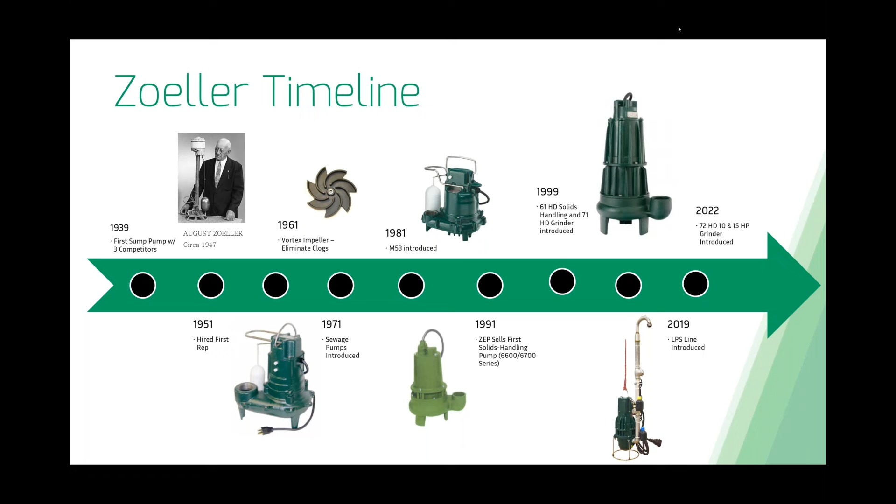Since 2017, we've added multiple items. In 2019, we were able to expand our low pressure sewer system lines to where we have more options available for drop-in replacements, new installations, stuff that we'll cover a little bit later on in this presentation. In 2022, we've had a few new additions with a horizontal discharge grinder and a 10 and 15 horsepower grinder pump that we'll cover a little bit later on as well.

So some of the highlights that we have for ZEP, we're not just a small pump manufacturer. A lot of people think of Zoeller, they think of just the M53 little half horsepower residential pump. We are a lot more than that now. We've expanded, we are up to 60 horsepower on solids handling pumps and now up to 15 horsepower on the grinder pumps. We also offer package systems through basins, control panels. So we're more than just a small little residential pump now.

Our product quality is second to none. We have quality checks from the point that the components come through the door, all the way through our painting process, through the machining process, and the assembly process, all here in the Louisville location. There are checks and balances all the way with the operators and our quality control team. And even the office employees, if they happen to be passing through the plant, they have an obligation to keep an eye out for anything that might not look right and let someone know to double check it before it actually gets built or shipped out to our customers.

One thing that sets the ZEP line, the Zoeller Engineered Product line, separate from the Zoeller Pump Company line is we are built to order. Our pumps are built specifically for the specifications for the job. So that might be a trimmed impeller, a shaft seal upgrade, cord length changes, whatever it might be. It's one person that's built that pump from start to finish and you ship it out the door from there.

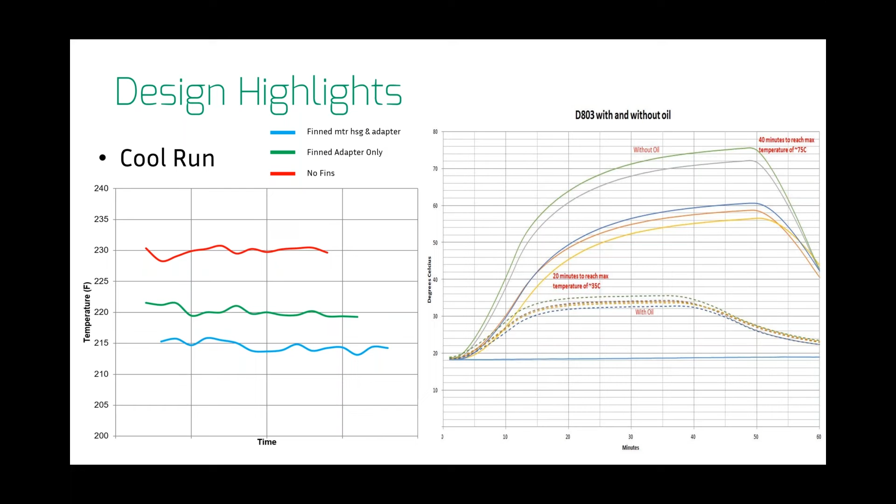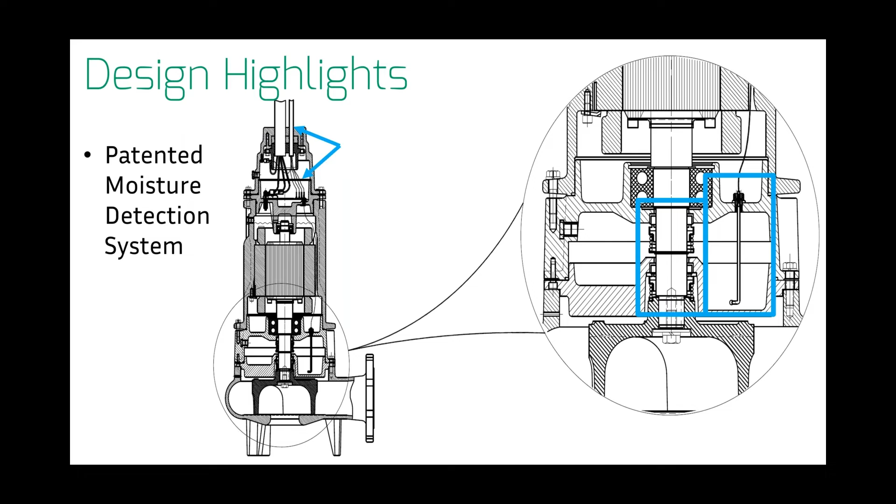Now, this only works if you have the feature built into your control panel. If you don't have that in your control panel and your pump does come with this moisture sensor, you would just cap off each individual wire and run it to your panel.

So there are two different designs that we have in ZEP: a single seal and a dual seal. The single seal is just one shaft seal on that pump, and the dual seal pump has the two shaft seals we just discussed. It comes with an adapter housing, giving it that extra cavity inside the pump. You can see side by side the difference in height between those two pumps.

The only pumps in ZEP that are not dual seal are our 6150 and 6260 series. On our grinder side, the 7008, 9, and 10, and our 7020 and 7021.

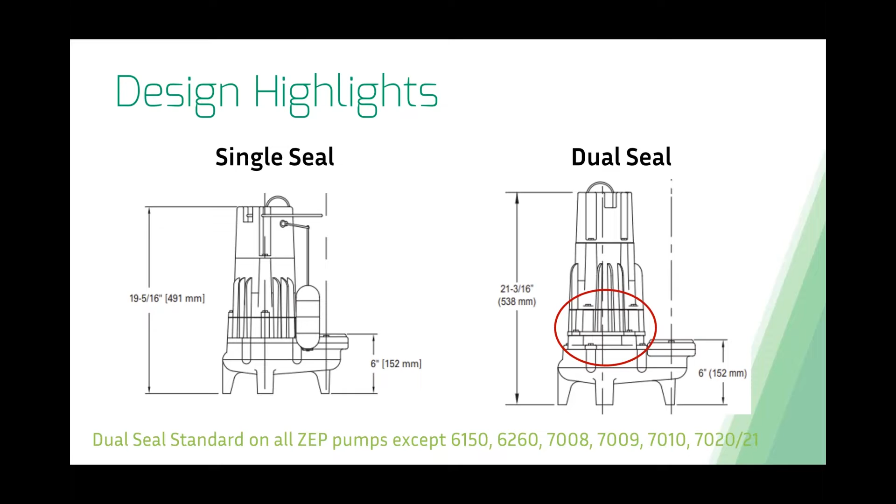So we're going to dive into the commercial duty pumps that we have here. This is going to be very high level, not getting into a lot of the details as far as performance or anything along those lines.

With our commercial duty pumps, the benefit is that any single phase pumps have all the starting components located inside of the pump itself. So if it's 115 volt single phase, you can use a piggyback switch to operate these pumps if needed. Of course, you could also use a control panel, but it gives you that option and flexibility to use a piggyback switch if needed. Like all of our pumps, each individual pump is 100% computerized water tested.

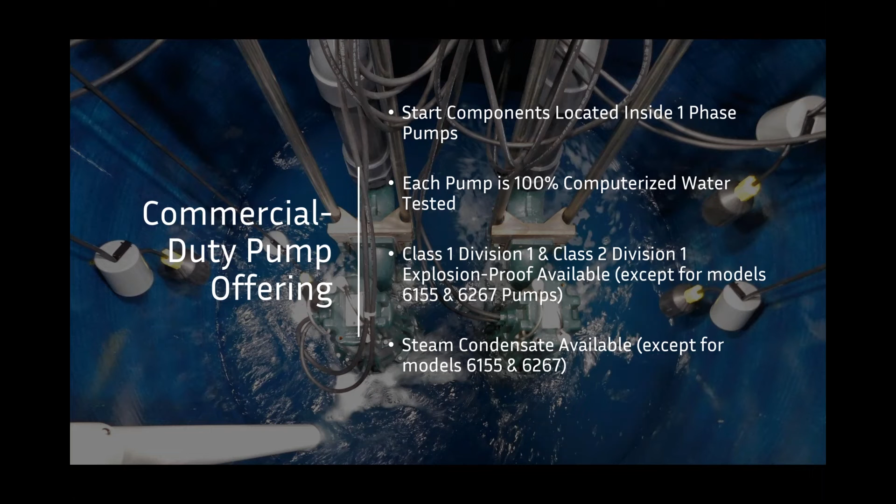We pressurize it, make sure there's no leakage between the shaft seals or gaskets, and make sure that pump is completely sealed up. All of our commercial duty pumps, except for the 6155 and 6267, have a Class 1 Division 1 explosion proof rating, which is for gaseous environments, and a Class 2 Division 1 rating for dust areas. All of our commercial duty pumps are rated for steam condensate, which is for things like boiler blowdown, except for our 6155 and 6267 model pumps.

So to get into each individual pump model here, our 6155 Effluent Pump is our half horsepower cast iron constructed pump. It uses an engineered plastic vortex impeller. This is one of our smallest pumps in the ZEP line.

The reason being is we had all these large pumps, but we weren't able to capture those smaller pump lines when a spec was going out or when a job was being awarded. So we had to create this pump in order to help our customers out, to have the full breadth of line that we have today.

It only comes in a 1.5 inch NPT vertical discharge. It uses a Viton gasket and a silicon carbide carbon shaft seal on that pump.

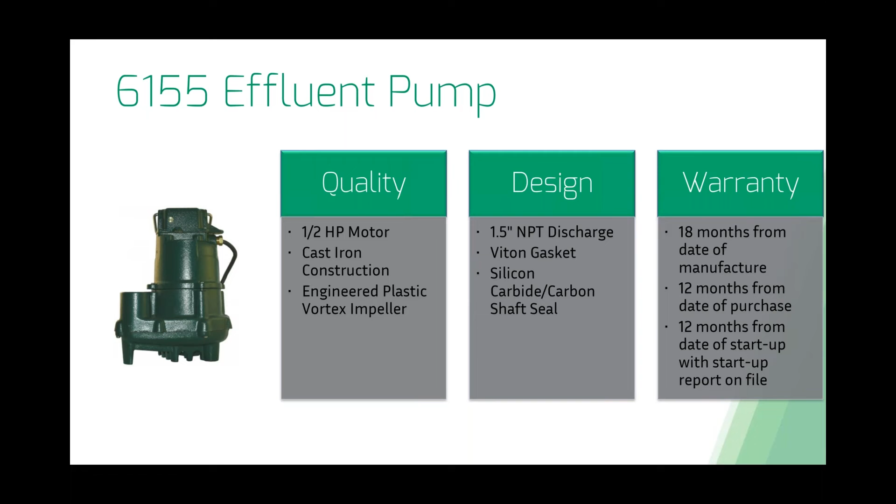Getting a little bit bigger in our Effluent Pump series is our 6160 and 6180 series. These pumps range from a half horse up to a 2 horsepower, and they use a cast iron vortex impeller. It comes standard with a 1.5 inch NPT discharge that's threaded on the inside of that flange that you see pictured there.

But if for some reason you are replacing a pump and you already have 2 inch or 3 inch discharge, we have the option to put a 2 inch or 3 inch bolted-on flange, like you see pictured, onto that pump there.

Now, this pump does have Viton gaskets. It is a dual seal, so it uses a silicon carbide carbon lower shaft seal and a carbon ceramic upper shaft seal. We're going to get into our sewage pumps on the commercial duty side with our 6267 pump.

This is a half horsepower pump using an engineered plastic vortex impeller with a 2 inch vertical NPT discharge. It is single seal using a silicon carbide carbon shaft seal and Viton gaskets.

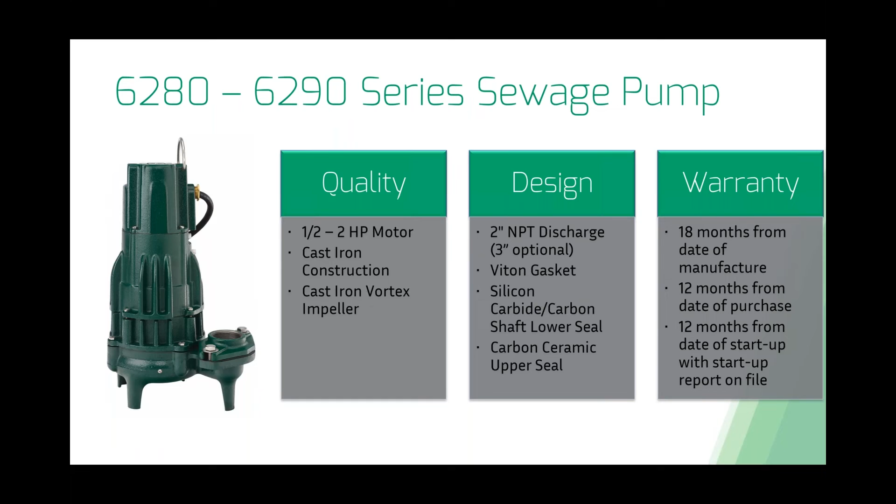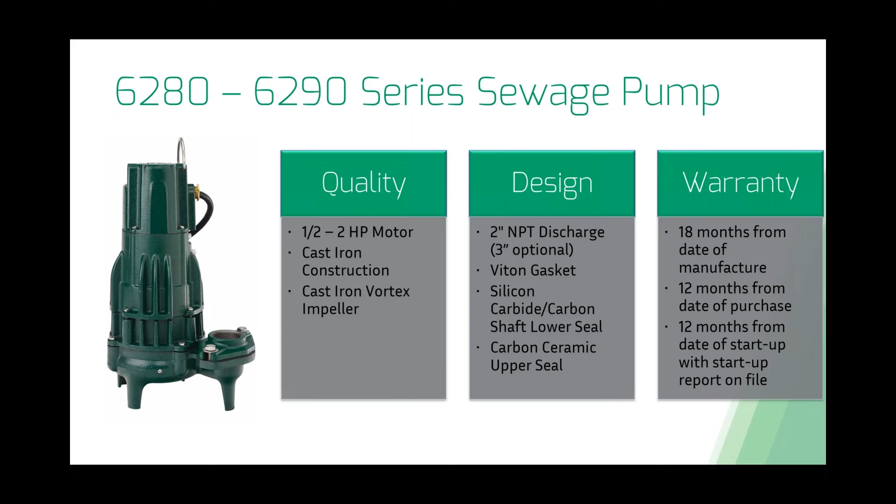Like our 6160 and 6180, we do have the sewage version of it, the 6280 and our 6290s, ranging from half horse up to 2 horsepower. They also use a cast iron vortex impeller, but they come standard with a 2 inch NPT discharge or 3 inch NPT discharge. Both of these are the bolted-on flange that you see pictured there. So when ordering, it has to be one or the other.

It does have Viton gaskets and dual seal, so it is a silicon carbide carbon shaft seal on the lower side and a carbon ceramic shaft seal on the upper side. In our 6400 series, we'll round out our commercial duty offering here.

We have it available in a 2 or 3 horsepower motor using the cast iron vortex impeller. It only comes available in that 4 inch horizontal flange discharge. It's an ANSI flange that we have on there. Like the others, it has a Viton gasket for all those gaskets built into that pump. And it is dual seal using a silicon carbide carbon shaft seal for the lower side and carbon ceramic for that upper side.

All these commercial duty pumps you're going to see more in smaller parking lots for dewatering applications. Could see them in a small school or a small strip mall, something along those lines where you're not requiring a whole lot of flow compared to what our larger pumps will do. But these are very robust pumps that we have to offer.

Now we're going to get more of our built-to-order pumps, if you will. So each pump in our heavy-duty solids handling pumps are built-to-order, customized for your specific specifications. Whether that might be a specific design point that you have to hit, we can trim that impeller down to hit that specific point.

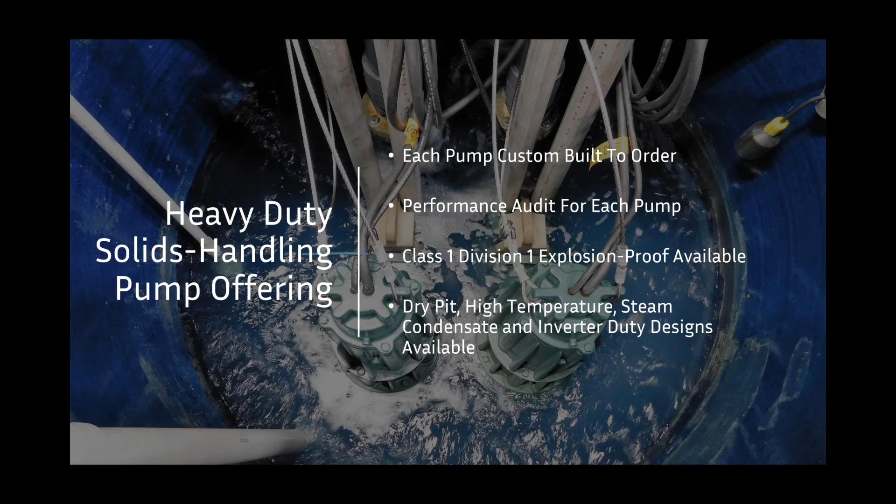First, we're going to dive into our 61 HD series. This particular one's available in 2 different motor styles, the 1750 RPM and 3450 RPM, with the 1750 RPM having a 1 to 7.5 horsepower motor and the 3450 RPM being 5 to 10 horsepower. These do come standard with the ductile iron semi-open impeller, but you can get a vortex impeller if need be.

Same with the discharge. It comes standard in a 3-inch or 4-inch horizontal, or of course a 3-inch NPT vertical discharge. With all these different configurations that you could possibly get with our heavy duty solids handling pumps, I will point out that it's a great idea to pay attention to your performance curves when selecting the pump.

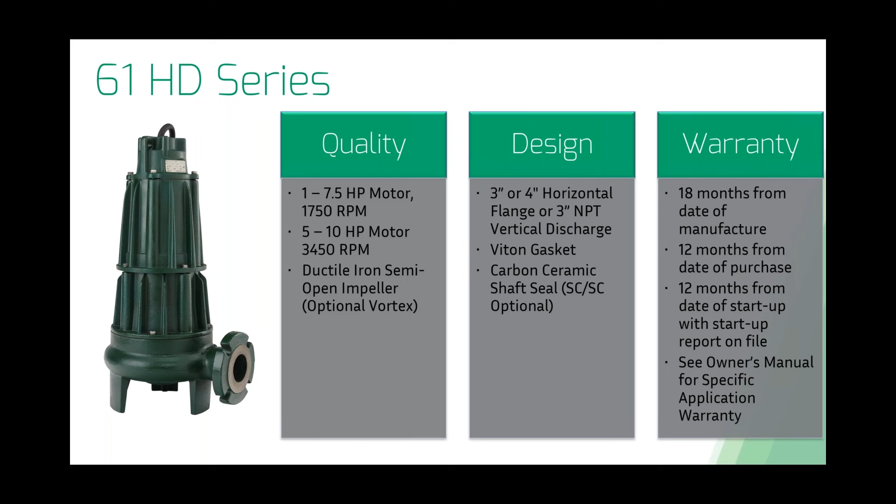I can say myself, I've done it too, where you're looking at a design point at one particular pump curve, but you're looking at the semi-open curve and not the vortex curve. Or you're looking at the 4-inch horizontal and not the 3-inch vertical discharge. So just verify whenever you're looking at these that you're looking at the right, even the right RPM curve, your right impeller, and your discharge curves, and even 3-phase and single phase can have a little difference in there as well.

Like our commercial duty pumps, these pumps come standard with a Viton gasket, but although they're dual seal, they come standard with a carbon ceramic upper and lower shaft seal, with silicon carbide being our most common upgraded shaft seal available for these pumps.

Going to go a little bit bigger with our 62 HD series, available in a 1750 RPM 5 to 20 horsepower motor. Like our 61 HD, it's available in a semi-open ductile iron impeller or the optional vortex impeller.

We also have a 4-inch or 6-inch horizontal ANSI flange discharge on these pumps, using Viton gaskets. Just like our 61 HD, it has the dual seal with the carbon ceramic upper and lower shaft seal, with the silicon carbide upgrade available.

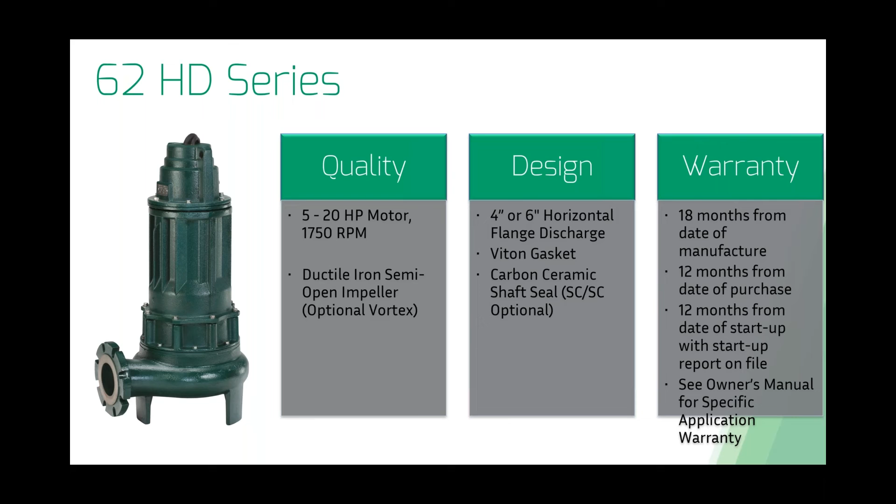Our last solids handling heavy duty pump is our 64 HD series, available in a 25 to 60 horsepower, 1725 RPM motor. It uses a ductile iron enclosed impeller, and we also have a vortex impeller available now for the 4-inch discharge. It comes with Viton gaskets and again the carbon ceramic upper and lower shaft seal, with the silicon carbide option available.

With these heavy duty solids handling pumps, we keep job folders on all of our serialized pumps. They have the history of that particular pump.

So say you order a pump with a semi-open impeller, you get to the job site, a couple of years goes by, and you realize you're having a lot of clogging issues and the semi-open impeller is not able to get through all those clogs.

We can swap out the semi-open impeller with the vortex impeller if need be. Of course, we just have to verify the design point and all that, because we do lose a little bit of design flow with the vortex impeller over the semi-open impeller.

We'll keep track record of that in our job folder, so down the road when you need to replace that pump, we'll have that record to show, hey, we switched it out at this point in time. Do we need to switch it to a vortex or keep it with the semi-open impeller? It's just a good living library of that pump while it's in that application for any records that you might need for down the road.

So from the solids handling pumps, we're going to switch gears and get over to our grinder pumps. Our grinder pumps use a scissor-like cutting action grinder plate and cutter. Some of our models, specifically our 7011 and some of our heavy-duty grinder pumps, have a reversing option on them.

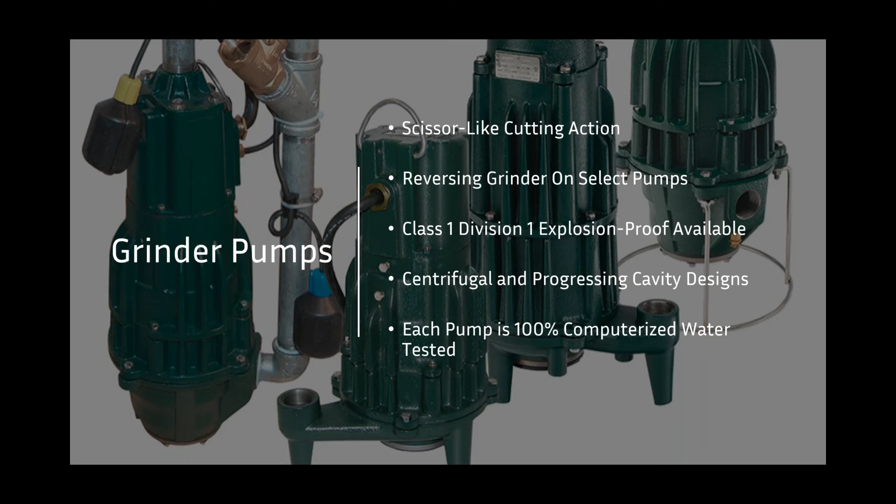So first we're going to jump into our single seal grinder pumps, the 7008, 9, and 10, available in 1, 1.5, and 2 horsepower motors with a vortex plastic impeller. You can see on your screen on the bottom left-hand side is the cutter plate for this particular grinder pump. It is available in a 1.25 inch NPT vertical discharge, and we now have a 1.25 inch horizontal discharge.

The benefit to that horizontal discharge is now we can replace our competitors' pumps with our pump. With the vertical discharge, we were handicapped and not able to go into a competitor's rail system, because by the time you adapted to the rail system with the vertical discharge, it made our pump too tall to actually connect up to the rail system. So we were eliminated, but now we are back in consideration for those types of applications.

They are built with the Viton gasket that we have across the Zoeller line, and we have a silicon carbide carbon shaft seal. Again, this is a single seal grinder pump that we use for that pump.

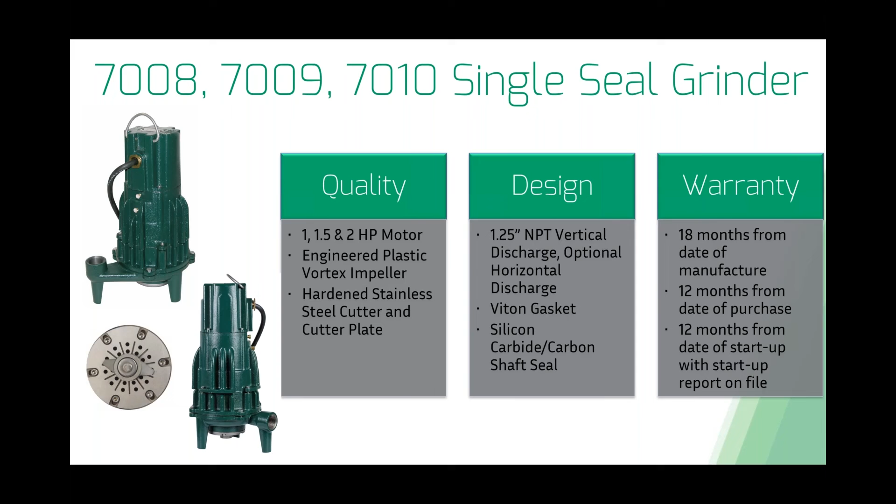Jump up here to our 7011, 12, and 13 dual seal grinder pump. All of these are a 2 horsepower motor. We have a ductile iron vortex impeller on the 7011 and 7013 with a bronze vortex in the 7012 model.

They use the same idea as the 7008, 9, and 10 cutter plate for the single directional 7012 and 13, but our 7011 is a reversing grinder pump, and you can see the cutter plate that we use for the 7011 on your screen here, using more of a star-shaped cutter. So regardless of which direction that pump is pumping, you're going to get the exact same performance either direction.

And just to clarify how the reversing grinder will actually work, it's not going to bump or reverse the same cycle. It's going to go, say, clockwise one cycle. Once it turns off and turns back on, it's going to go the opposite cycle the next time it's called out. These two have a 1.25 inch NPT vertical discharge or the horizontal discharge if needed to replace a competitor system.

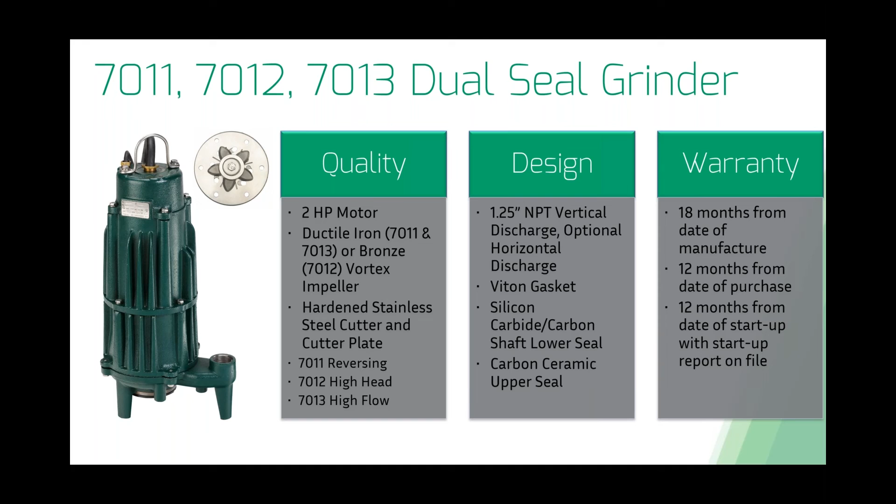Using Viton gaskets and being dual seal, we have a lower shaft seal that's silicon carbide carbon, and the upper seal is carbon ceramic.

Now we're going to get into our serialized grinder pumps, the 71 HD, available in a 3, 5, or 7.5 horsepower motor using a ductile iron vortex impeller. This particular model has a high head, high flow, or a reversing model.

It's a dual seal grinder pump using a carbon ceramic upper and lower shaft seal, with a silicon carbide option. Our new 72 HD series is a 10 and 15 horsepower pump that uses a ductile iron vortex impeller, currently only available in a high head model, with a 3-inch or 4-inch horizontal flange ANSI discharge. The pump pictured on the left is the 4-inch discharge, and the one on the right is 3-inch.

We use the exact same pump housing from the 4-inch pump, but cut into that adapter flange for the 3-inch discharge. If you want to stock these, or aren't 100% sure if the pump you're replacing is 3-inch or 4-inch, I recommend ordering the 3-inch discharge, since you can adapt it to either a 3-inch or 4-inch flange discharge without issues.

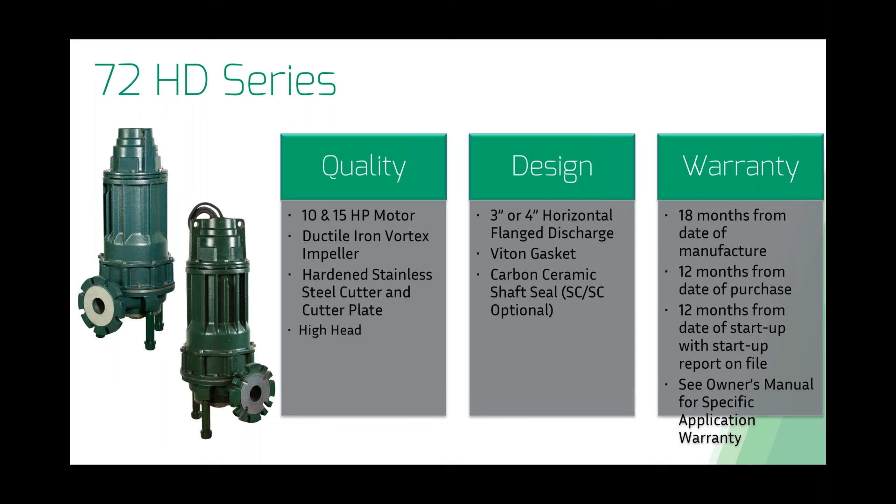This pump has Viton gaskets and carbon ceramic upper and lower shaft seals, with silicon carbide as an option. Both the 71 and 72 grinder pumps allow you to trim the impeller to your specific design points, just like you can on our heavy-duty solids handling pumps.

The ones we just covered are our centrifugal grinder pumps. We also have 2 models, the 7020 and 7021, that are progressing cavity pumps, available in 1 or 2 horsepower motors. Instead of a vortex impeller, they use a hydraulic rotor and stator configuration to move the water.

At the top right-hand side is the hydraulic stator, made of a Buna material, so if you try to squeeze it, it's really tight. We use the hydraulic rotor that goes inside of that and spins.

With that hydraulic rotor, there are a couple features you can see: pump out vanes that help push debris away from the shaft seal, and a shaft seal pocket. You can see the shaft seal expanded out from that hydraulic rotor there. That shaft seal sits down inside that pocket and protects it from any debris in that material.

Our competitors do not have the deflector shield with those pump out vanes or that shaft seal pocket, so their shaft seal is exposed to the liquid and whatever abrasive material is in that environment. As that hydraulic rotor spins inside the hydraulic stator, it creates real small tight pockets for the water to be pressed through, and that's how we're able to get the shutoff pressures on this pump.

If this pump were to run dry, it would melt down that hydraulic stator, opening up those cavities and giving you more flow. Some people say more flow is great, but these pumps aren't meant to have high flow. We're talking a max flow of about 15 to 16 gallons a minute on the far right side of the curve.

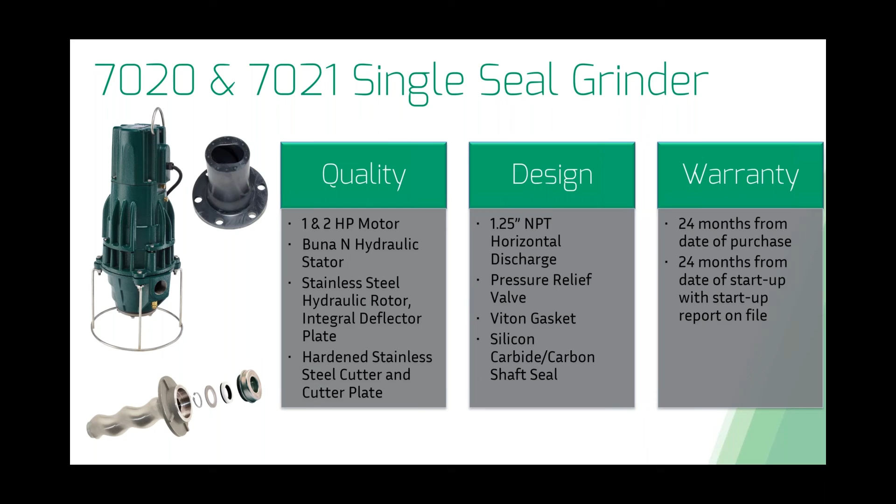The reason we do that is because we know your sizing and piping system based on what the pump's PSI output is, and we do not want this pump to fail and blow out all your fittings because it went above our specified PSI rating. So it's just a safety feature built into these pumps for your piping system. This pump is built with the Viton gasket and uses a silicon carbide carbon shaft seal as well.

So the progressing cavity grinder pump, of course, we can sell individually, but we also use it in our low pressure sewer systems. First, we're going to talk about our replacement units, the 6932. Again, this uses the 1 horsepower or 2 horsepower progressing cavity pump, and we can do it in a candy cane or a gooseneck discharge, whatever you might call it, shown in the first 2 pictures of those pump assemblies on the right-hand side.

We have it available in a flex hose system that has our competitor's disconnect at the end of it. With the candy cane or gooseneck discharge, there are a couple of options we have there. We have it cover mounted, which is what our competitors use, or you can do it freestanding.

The benefit to the freestanding is the pump is actually sitting in the bottom of the tank, so it's not suspended, but it allows you to open up where that cover would be to see what's going on in the bottom side of that basin. So if something were to happen to the pump in a cover mounted system, you'd have to pull the pump out, inspect it, clean it, and stick it back down inside the basin. Whereas with the freestanding, that opening is exposed, and you can even do your maintenance check and spray it down from the top if you wanted to clean it instead of having to pull it.

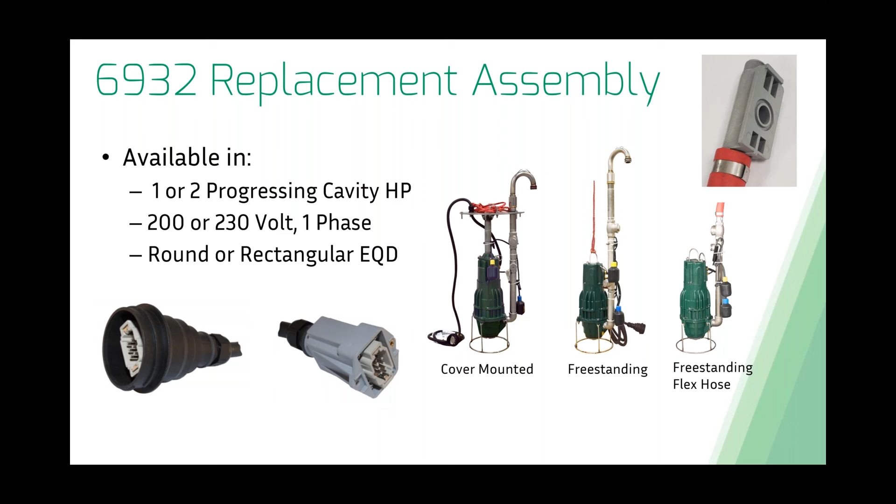The other big thing we want to make sure of when we're trying to cross these over is what type of EQD do you have? An EQD is an electrical quick disconnect, whether that's round or rectangular. I will say if for some reason you order the rectangular and find out it's a round plug when you get to the job site, that can be swapped out in the field. We have the components for that. It's an easy 10-minute fix to get that swapped out so you're up and running and good to go.

For new installations, we do have package systems already ready to go for you, which includes the panel, the pump, and the basin. It's going to be the rotomolded basin pictured here, and that's included in our 6922 package system. This will include an RWD or an E model.

An E model, which is what most people are familiar with, is a non-automatic 230-volt single-phase pump, which you would have to run to a control panel and use your float switches to turn the pump on and off.

An RWD model, which is what we have pictured on the left-hand side with that flex hose system, actually has an on and off float and a high water alarm float, which also acts as a redundant on-off switch hardwired into the head of that pump. So you only have one power cord, six wire coming out through the top of that basin there.

These polyethylene basins are available in a 30 by 72, but if you do need to go a little bit deeper, you can do a 12-inch or 26-inch riser on top of it, just to put it further down into the ground. They're available in a wet well or a wet well, dry well configuration. We install the check valve, ball valve, discharge piping, all that you'll need just to drop this system into the ground and go.

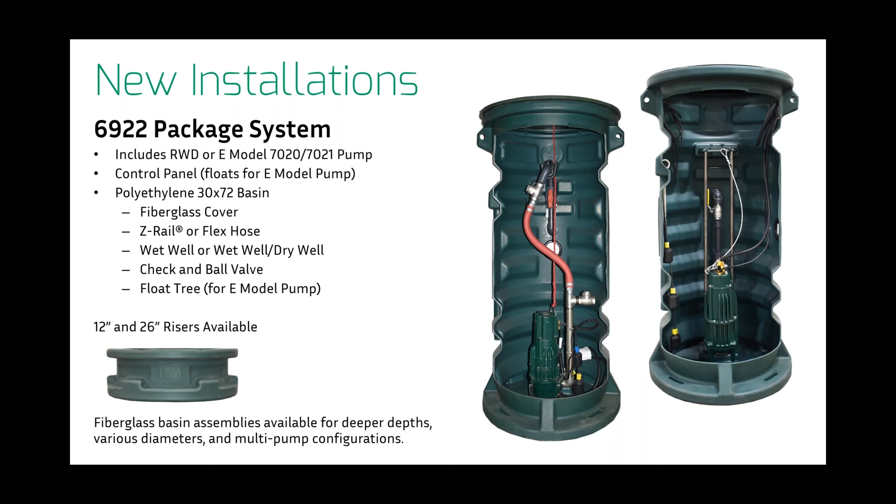If for some reason the 30 by 72 or the 12-inch or 26-inch riser is not deep enough for you or round enough for you, we can go into fiberglass and go bigger on those basin assemblies. Especially if we need to go duplex, we'll have to go bigger in diameter. But if we need to go deeper than that 98-inch, fiberglass is the direction we'll need to go.

Some of the LPS accessories include a curb stop and a curb box, which is pictured here on the right-hand side in the drawing and the actual picture itself. The importance of the curb stop is it's an extra ball valve, if you will, that's out near the main.

If for some reason you're working inside your system and your ball valve in the basin has failed, or you're doing work on it and forget to close it, if you do not have that curb stop, the entire city's worth of sewage out in the street is going to be coming your direction. That pressurized main is looking for the path of least resistance, and if your valve is open, that's going to be the least resistance part of the force main, and it's going to be coming back towards you.

So we'll always recommend putting a curb stop in. The curb box just goes over top of it so you can get access to that turn valve that's inside there. Just make sure that's turned to closed, and then you'll be able to work inside your system knowing that you have that extra protection out at the street.

We have a stainless steel discharge flex hose that we can offer. Of course, basins settle, and if it's hard piped, that settling could potentially break that PVC piping. But with that flex hose, if there is any settling, you'll have a little bit of flexibility there to prevent any type of breakage in that discharge line.

Last big thing that we now have is our LPS panels. These panels are specifically only for the RWD model pump, so they take the 6-wire cord. And because of that, we can use that on our competitors' system as well. If we need to replace a competitor's panel and their pump's still working, we have that option now.

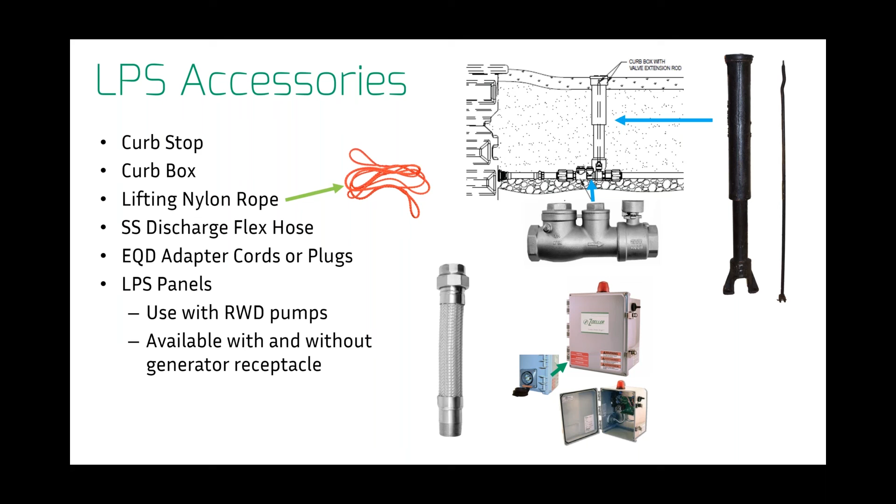All the same features, but we also have our Z-Control capabilities built into these panels. Comes standard with or without a generator receptacle. The 61-204-0001 does not have the generator receptacle, but the 61-204-0002 does.

So kind of wrapping things up here, we've talked pumps, but again, we can provide the whole system for you. We have the panels, basin assemblies. The best thing about it, as soon as it shows up to the job site, all you have to do is have the hole dug, drop everything in, run your electrical, and your job is complete.

Go over some of the components that we do have. Control panels, I'm gonna call them stock panels. These are panels that we have sitting on the shelf, standard features, very cookie cutter, if you will. Simplex, duplex.

Outside of that, we can get into our custom panels. It could be a 2-page spec or 100-page spec. We can build a panel specifically for whatever specifications are called out for that control panel.

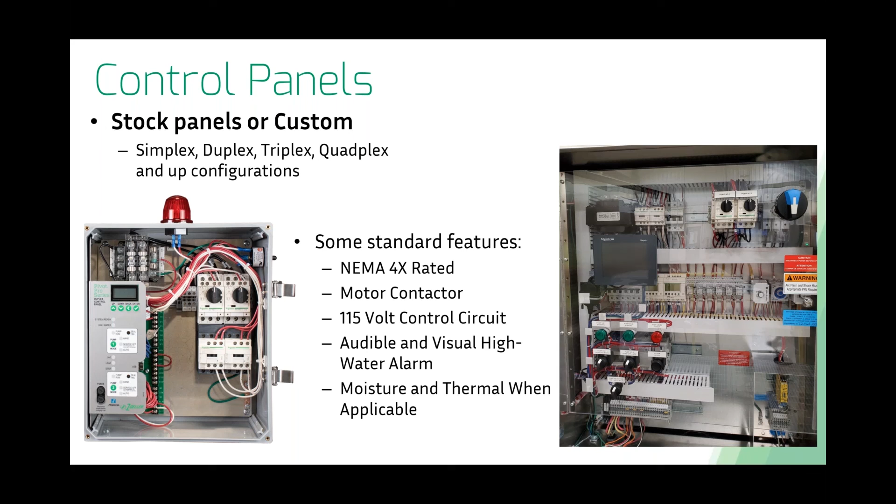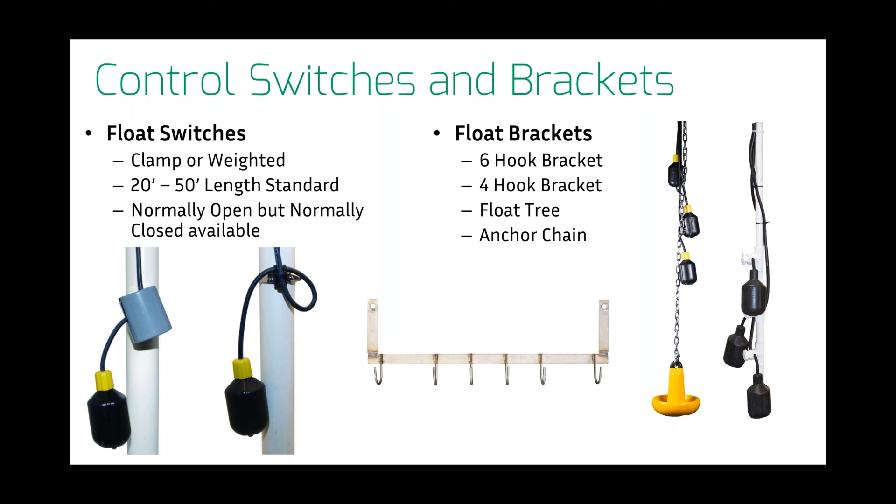We have the float tree that we mentioned just a second ago, pictured on the far right-hand side. And now we also have a float tree similar, but it's going to be in a chain form with the weight sitting at the bottom of that basin, and then on the chain links you'll be able to clamp your float switch to act as the pivot points.

One of the biggest things that we offer that a lot of people don't realize is we do offer custom package systems. We can quote anywhere from 24-inch up to 120-inch in diameter. 48 inches is typical shallow depth for a rail system. We can go all the way up to 360 inches, which is 30 foot.

We could probably go a little bit deeper, but I know firsthand 30 foot's the deepest I've ever quoted. Pretty sure we can go much deeper than that if need be.

A couple different cover option materials that we have: fiberglass, steel, or aluminum. We have it available in a solid cover or a hatch cover. In that hatch cover, we have a gas tight or just like the standard hatch. The difference is the standard hatch, you actually have the hinges on there, so it's easy to open. A gas tight hatch, which you would typically use indoors to keep fumes from getting out of your basin, is going to be bolted down with no hinges. So if you need to remove that, you just have to remove all the bolts that are in there. It's gasketed. Remove that hatch, and then you can get access to those pumps down inside that basin.

We have this available in 1.25 inch up to 6 inch discharge piping, just depending on what pump model you have. We'll pair up to whatever discharge piping size we need. And we will run that piping, whether it's through the cover or out the side of your basin, depending on the depth that you ask us to.

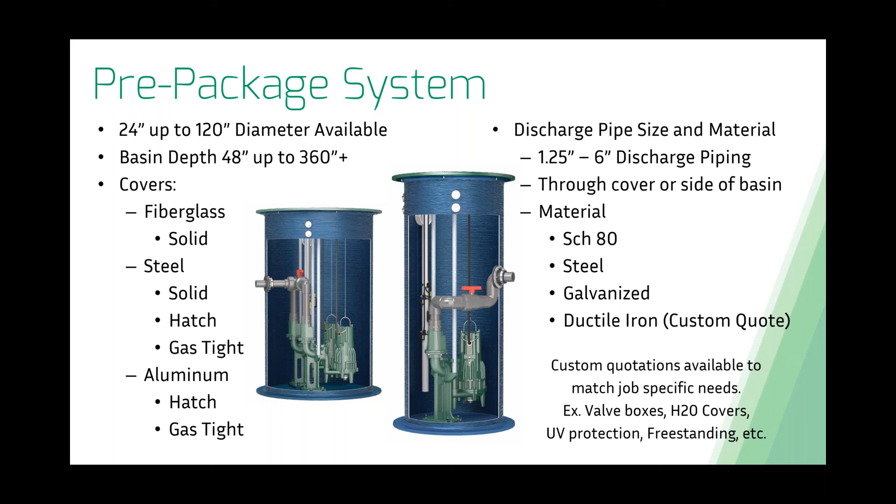Just a couple quick pictures here. The picture on the left-hand side is a basin with an attached valve box, and the basin on the right-hand side is a 96 inch diameter basin that we actually had to build on a flatbed out in our parking lot just because of how large it was. It couldn't fit inside our dock doors at the time.

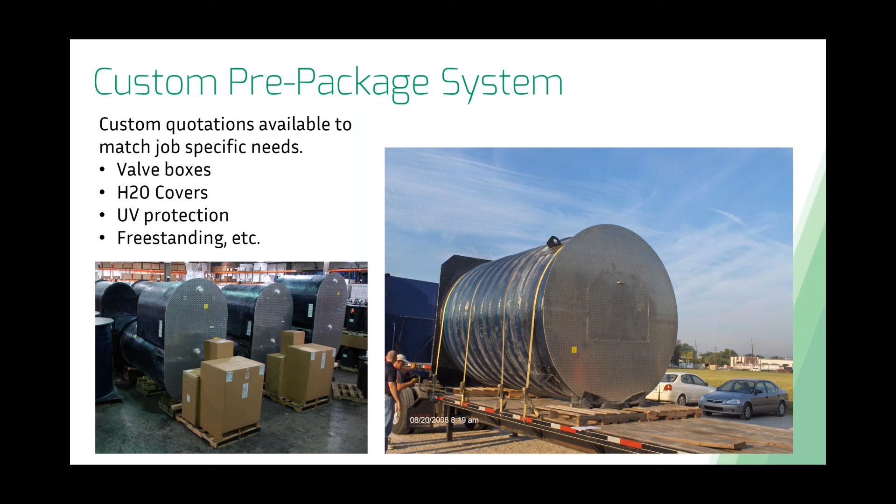Now, I'd love for you to be able to buy a package system from me so I can build it in-house, but I understand you can't always do so. You can use concrete, or you may already have an existing basin in the ground that you want to retrofit. If so, we do have some components available.

We have rail systems that you can buy. When you buy that rail system, it'll come with the base elbow, the disconnect that attaches to the pump, and the upper guide bracket. The guide rails themselves, whether 3/4 inch or 2-inch, will have to be supplied by the contractor or installer, just because we don't know what that exact length will be.

And even if you tell us what length it will be, I guarantee it'll be different by the time it gets to the job site. So we put that on the installer to make sure they get the right piping. That can be galvanized or stainless steel - we prefer stainless steel so it doesn't degrade over time, but that is there for them to install.

On basins that are 10 to 12 feet deeper, depending on the rail system, you will need an intermediate guide bracket. If you order the package system from us, we automatically include that. But if you're doing a field install, that will be a separate item that has to be purchased. That just keeps those guide pipes from basically becoming like spaghetti - the longer they get, the more wobbly they get, and that pump could potentially come off those guide rails if it gets too wobbly.

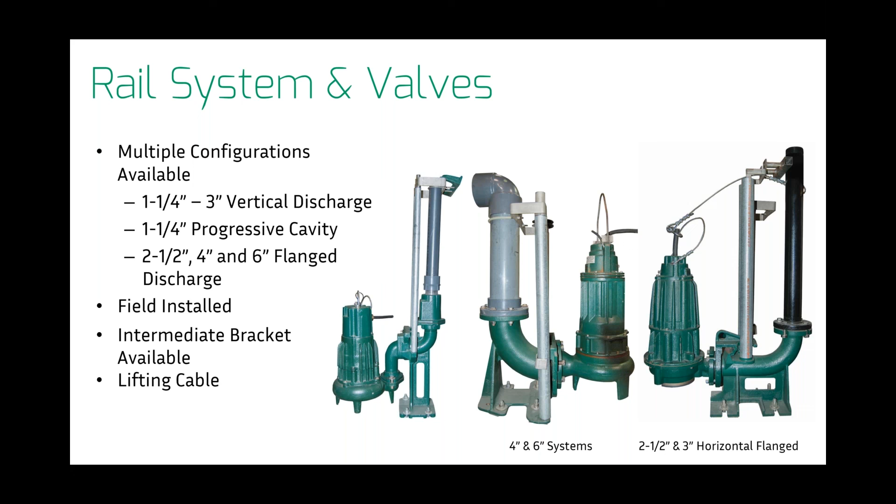And then a lifting cable - we provide that. Some people prefer chain, but we don't offer chain, so we can do just the lifting cable. So a couple of configurations that we can do for you if needed.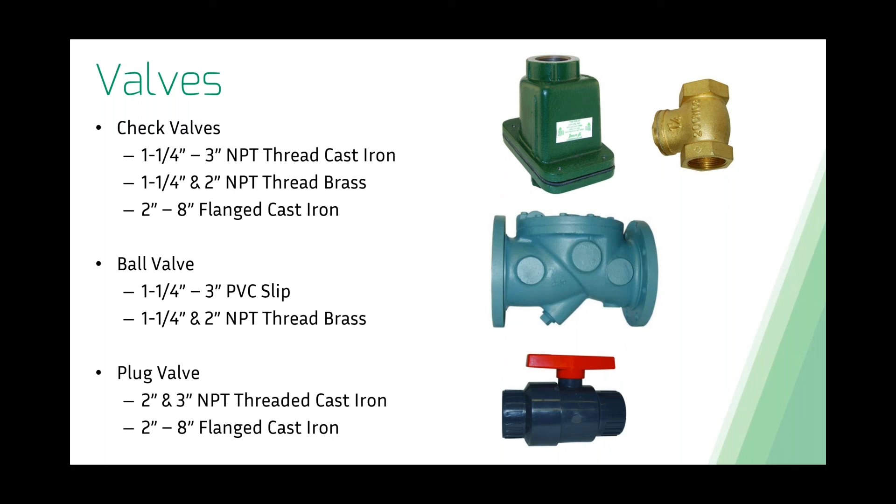We offer valves - check valves, ball valves, plug valves, all shapes and sizes, if you will. We even offer some valves that aren't even on our literature. So if you have a special application needing some type of valve, please reach out to us. My inside sales team will be more than happy to work with our vendors to see what we can get for you, so we're making sure we're building the package system that meets your needs for your job site.